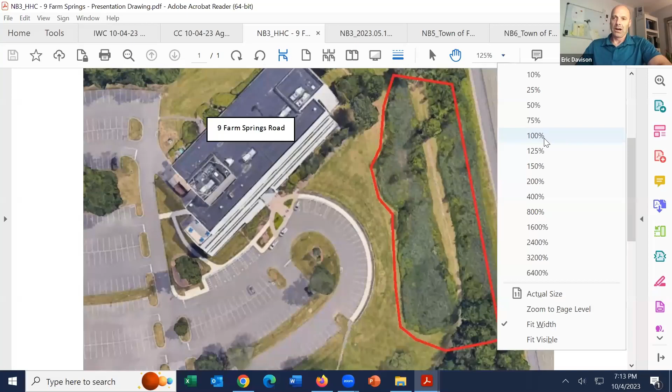My comments here are not referencing the highway right of way, because Andrew's arborist has indicated he has the necessary permits to do the work needed in the I-84 right of way, which is not subject to Farmington's regulations anyhow. So to reduce confusion, my comments relate just to the detention basin. All of the trees we want to clear are in that detention basin.

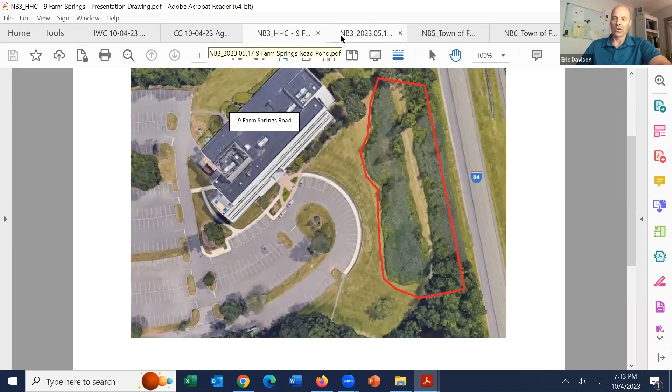The detention basin is entirely man-made. It is a stormwater structure created in the 70s, built in an upland. It has no relation or origin to a natural body of water or wetland.

Bruce had indicated in his feedback that I should explain to the commission what the function of this wetland is. The principal function of a detention basin is water quality renovation and water quantity control, protecting downstream waters from the impacts of pollutants in stormwater. So that's the function of this wetland.

In its current state, it's not functioning well because it hasn't been maintained in many decades. Our best assessment, because it's so thick, is that it's in a flow-through condition, meaning stormwater comes in one side and out the other on a gradient, with no retention time we can tell. There's probably not much storage in there, so you're not getting opportunity for sediment fallout or slow release of flow and interaction with dense vegetation over hours and days, which is how stormwater gets clean before discharge. So our best assessment is it's not functioning that way anymore.

Some background on detention basins themselves: going back to the late 90s, when I first started as a soil scientist, the state gave guidance for the first time on what soil scientists do when they encounter a detention basin or created stormwater wetland on a site. Are those regulated? Technically, yes, they are regulated as wetlands, but solely for the purpose of protecting the design function of that resource.

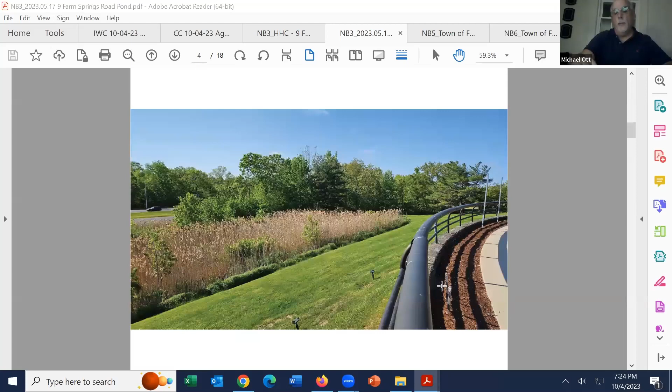So just really briefly, the design plan that Bruce was nice enough to get us from the town's records has a 1979 date on it. I mentioned this at the last meeting - I think it might be fair to say that stormwater quality didn't have the same focus then as it does today.

We don't know what the actual design intent of the stormwater basin was. More than likely, it was purely intended to be a stormwater detention basin - in other words, intended to control peak rates of discharge leaving the basin. However, as we discussed last time, there's a 12-inch diameter pipe and a 24-inch diameter pipe, and those are rather large waterway openings as outlets for the basin.

So we'd have to, just really briefly, determine the exact catchment area or drainage area - the land area that contributes surface water runoff to the basin - as well as the storm drainage system, which you can see here in the town's GIS that Bruce has up, that is discharging to the basin.

It appears, in my quick look - I mentioned this last time - that parcel or street address number 10 on the other side of Farm Springs Drive or Road may contribute stormwater runoff, at a minimum through its storm drainage system, to this basin.

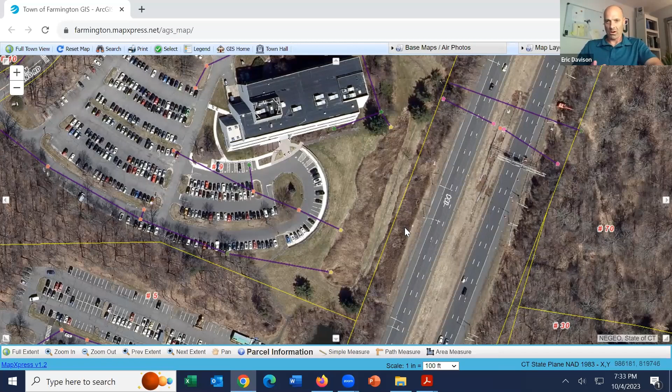I guess what I'm struggling with is, from a habitat perspective, you've got basically a Phragmites monoculture. You've got no standing water. And you've got stormwater, which is obviously low quality water with pollutants in it and low dissolved oxygen. There are a million references showing that a stormwater basin that's a Phragmites monoculture next to a parking lot on the highway doesn't have any habitat value.

Could it be improved if you converted that to native vegetation with a seed mix and low growing, more diverse wetland vegetation, which would be the intent? It would be better, but I would say there's very little habitat value with a stormwater basin in this landscape context. There's no open water for any amphibians to breed.

Yeah, I just, without documenting that firsthand, I can tell you that I see no opportunity for any real habitat value. But I'll let you go on to the other commissioners.

Thanks for the feedback. You've probably gone a long way towards coming up with the functional assessment, so you probably supplemented a little field work for that additional review. It probably wouldn't be a big deal to roll that into the overall work plan. So thanks for the feedback.

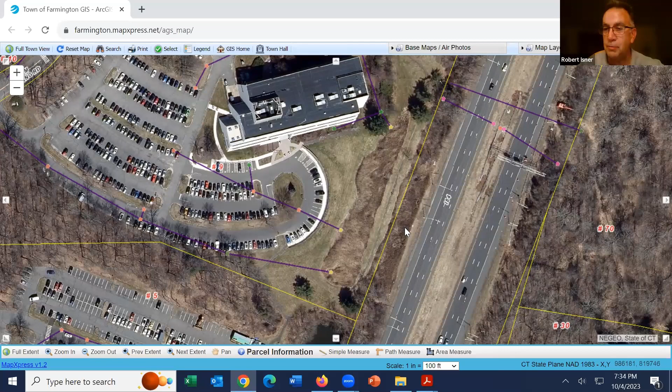I'll go around and Chairman Hannon, I'll give you the first opportunity for additional questions or comments, recognizing that you're present, and I'll then go alphabetically after that. Bruce, can you pull that picture out a little bit so we see a little bit more of the surrounding properties?

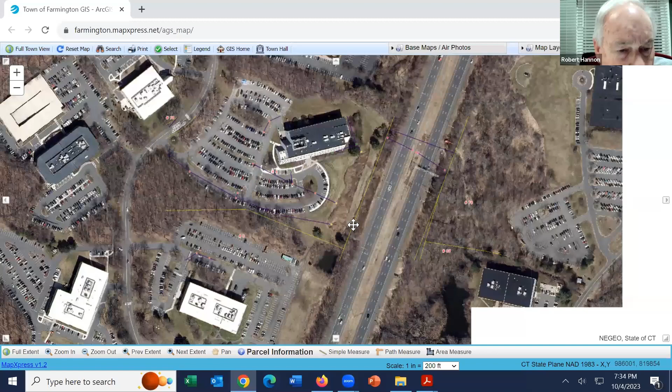How's that? Okay, that's maybe a little too far. The reason is, what I'm trying to look at in that area is where a bunch of the stormwater currently goes. It looks as though a lot of it comes down that one pipe. I'm assuming that's the 24-inch pipe.

Okay, now the reason I'm asking is because one of the issues that we've dealt with in the past is when you start getting higher concentrations of salt and stormwater, things of that nature, it tends not to be conducive for vernal pools and things of that nature.

So I kind of understand what Eric's talking about, in terms of just because of the nature of where the water's coming from, how that really may not contribute to any positive aspects of habitat for whatever type of invertebrates might be there, which I'm not even sure there would be because of the highway and just the heavy use of the property in the general area. So I agree with Eric.

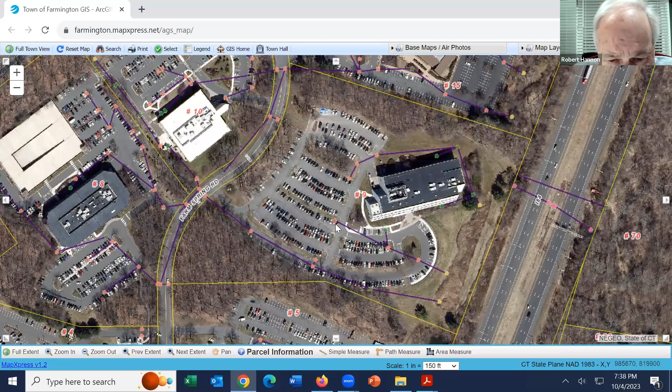I guess where I had some original concerns, but again, it wasn't from firsthand knowledge, but just kind of what I've heard, because unfortunately I missed the last meeting, was cutting some of the trees.

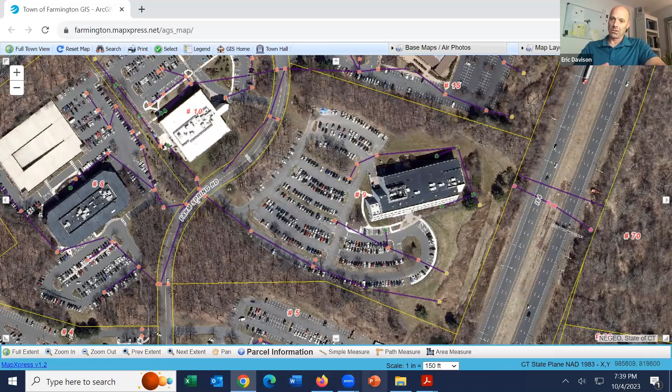It sounds like right now the entire basin area, the trees in there, all that's coming down as a way to restore the basin. The question came into play, assuming right along parallel to the property line along the highway, that's where the walking trail is. And the area you were talking about, where there would be clearing down to the highway or the fence, what's on the eastern side of that walking trail, correct?

So it's selective cutting of saplings. You're really converting what's now being slowly converted from a marsh to a forested wetland - it's just going to be converted back, which is what DOT is doing along every highway in Connecticut right now, basically cutting those roadsides. So it's not a significant change to the wetland, it's just controlling succession from marsh to forest and taking out this tree sapling. Without stumping and without machinery in the wetlands, that's very low impact.

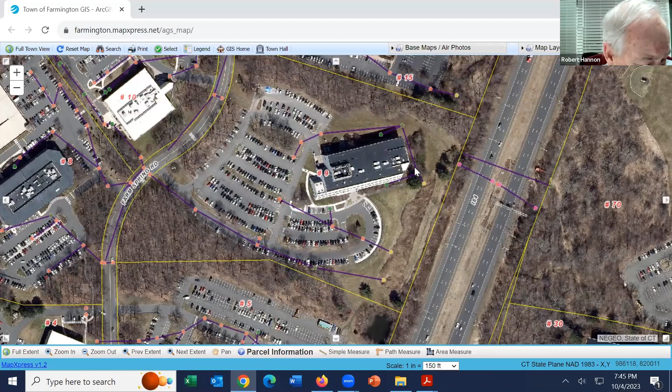Especially if Mike, if it showed that you couldn't get proper sediment control with just the basin renovation itself, that would be good pre-treatment.

Okay, thanks Robert, I think that does it for me. Okay, we'll go around alphabetically to see if there are additional comments or questions. Rich, that'll bring you up. I think everybody's pretty much covered everything I had today, so I'm good. Thank you, okay, Commissioner Fox.

Yeah, I'm in pretty much the same situation, but I'm confused as to what it is we're going to be approving. Is it going to be a two-phase thing? Would we approve them taking down all the vegetation and then approve a plan for the better water quality basin? Or are we going to do it all at once?

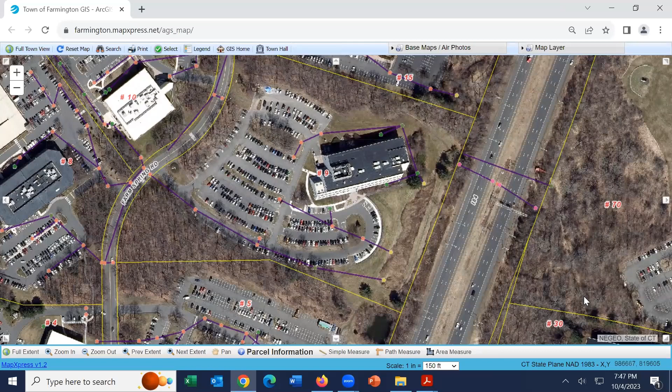A great question, Dave. I was buried behind one of my screens here with the agenda review notes, and I'm not immediately finding the staff recommendation. So Bruce, if you want to give us a reminder on the recommendation for tonight, that would be helpful. Well, that was the request of the applicant - they were looking to do this in a two-phase process. First phase would be to clear the trees, second phase would be to do the surveying and design, then the earth excavation and removal of material, and then the upgrades to the basin. Okay, that seems to make sense. Thank you.

Commissioner Kelsey. Yeah, first of all, thanks for the additional perspective and information tonight, very helpful. Just one question on the mowing.

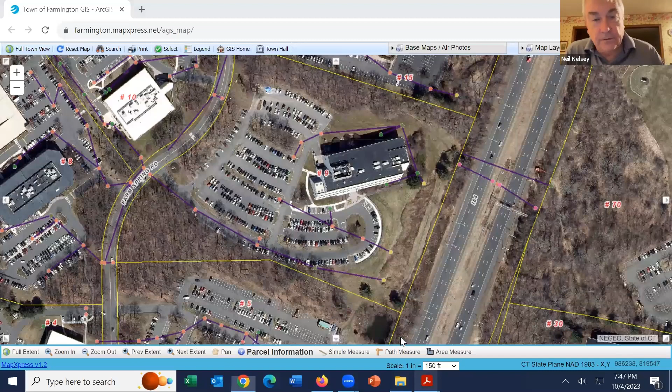If you go back a couple pictures, Bruce, where the fence line was on the left - I think Commissioner Hannon was talking about mowing the stuff to the left there. There's a fence in there, if I recall, right? So the fence is right about there. Who would be responsible for that mowing - is that Hartford Healthcare or DOT? Who's responsible for the other side of that fence? The fence is roughly the property line, that's the no access line. So everything on this side of the fence would be the property owner, everything on the other side would be DOT property.

So any mowing Commissioner Hannon was talking about would be done by the DOT in that area? Well, they have a permit from the DOT to do the initial clearing in the right of way, they got approval. Yeah, I'm talking about the ongoing maintenance, so it doesn't come back. Okay, yep.

Is the future maintenance a DOT responsibility, or is that also Hartford? That would be DOT maintenance. I don't know how frequent they'd be in there cutting that. If you look at the road now, their typical interval would be maybe every 10 years, or 5 years, whatever they do. I couldn't guarantee how often the DOT would be in there.

That's why I was asking, it's possible this comes back, right? Yeah, it could. But if you look at this, it supposedly hasn't been cut since 1970 or 80. So if that's the case, we're talking another 40 years or so.

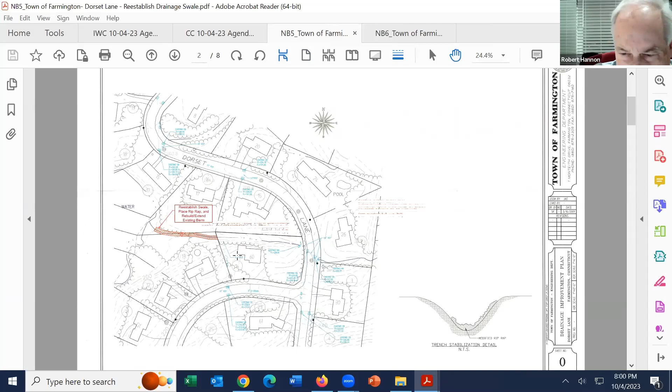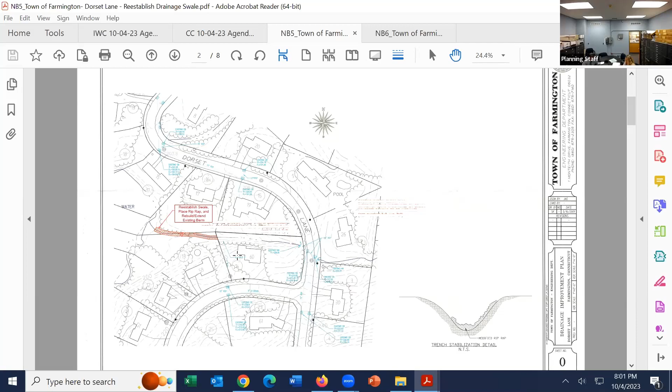Okay, number 6, cease and desist, 504 Main Street. 5 is for the town of Farmington, 17 and 58 Dorset Lane. Am I looking at an old agenda? Yeah, that's probably why you're having problems signing in. No problem, so what is it now? It's for 17 and 58 Dorset Lane, regulated activity. We have Dylan Reilly from the engineering department here. We'll do the Dorset Lane, Town of Farmington.

Good evening everyone, for the record my name is Dylan Reilly, I'm a civil engineer for the town of Farmington. For this application at Dorset Lane for properties 17 and 58, we are looking to reestablish the storm drainage swale that runs from the 54-inch cross culvert there. We did a similar project in 2001. This project is essentially the same, just shifted down the swale to between the 17 and 58 lot lines, where we've had issues brought up by the homeowner of 17, where the swale no longer seems to be holding the water back during mild to larger storm events, and is flooding out his property.

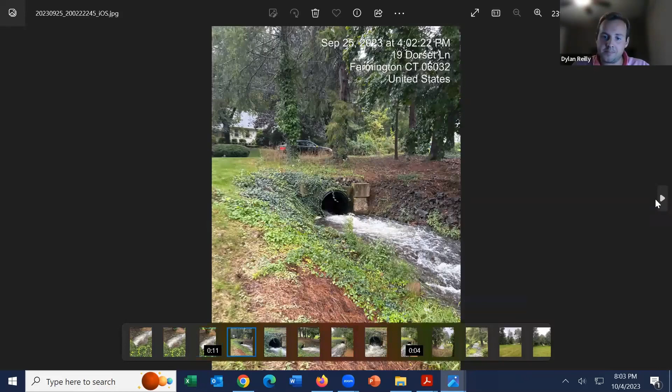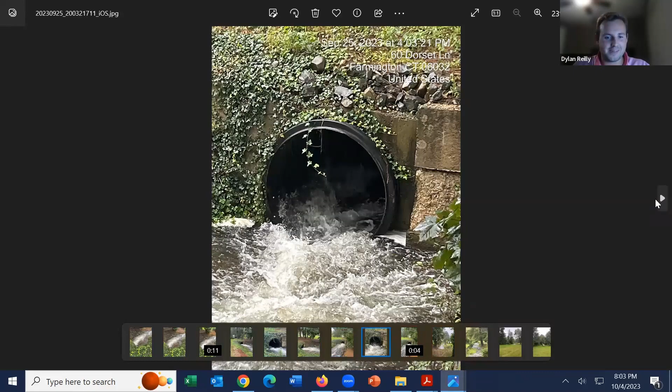As you can see, this is pretty channelized up in this end. I take a lot of photos. This was the 25th, I believe a Monday, and the weekend prior we had heavy rains or steady rains throughout the weekend continuing on to Monday. These photos are Monday afternoon, timestamp 4:02 p.m. So it was still raining, just not as heavy as it was over the weekend or earlier Monday.

So all of this is essentially runoff from up the mountain. And here you can see the back of property 17 Dorset Lane, where the water is intruding onto his lawn area out of the swale, going into Curtin's Pond, or formerly Curtin's Pond. When I was out there, I tried to get as close as I could to the swale where it was failing. That water is approximately 8 inches to a foot thick or deep, perhaps 1.5 feet. So it's a lot of water coming out of the swale and spilling onto his property, super saturating his lawn and making it unable for him to maintain it. And then it sheet flows off his property to where Curtin's Pond was. A tree has fallen, but doesn't seem to be affecting the swale.

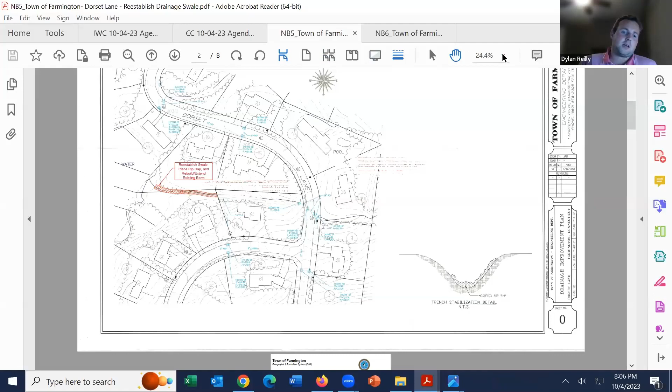Our plan is essentially the same exact plan that we did up the swale between 19 and 60 back in 2001. We're just moving down the swale, doing the same project further down. The call out here is to reestablish the swale by removing any debris and sediment within it, just as we did in 2001. We'll be placing riprap to curb erosion and prevent this from happening again, and we will rebuild and extend the existing berms on either side of the swale, rebuilding where they've failed and extending where needed, as was similarly done in 2001. The hatched area shows the approximate area of work.

Is there a reason why you're just stopping the work right at the property line? It's all channelized up there, and I see no issue there.

I think you could see from here how well channelized it is through there until it gets past that shed, over in here. So it's past that area at that point. That's where it comes. It's fairly well channelized through 58 as well. It really starts degrading once you get to the property line of 17 and 58, that's where you start seeing the big change. I just went that far back in case there was anything up the swale that we needed to correct while we were in there doing work, but I don't foresee us going any further than the property line of 60 and 58.

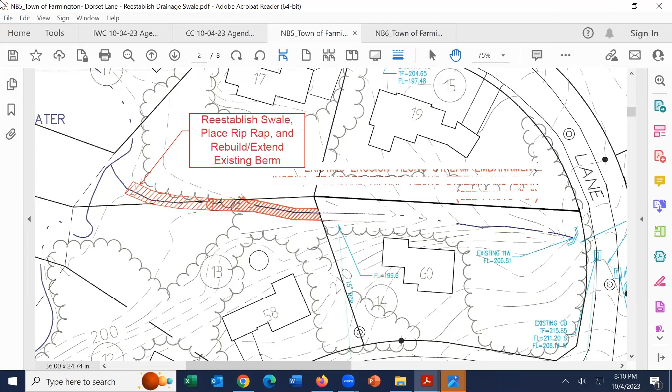Okay, Rich, comments, questions? No, I don't have any questions. Thanks. Okay, Dave? I was just curious, what happened to Curtin's Pond?

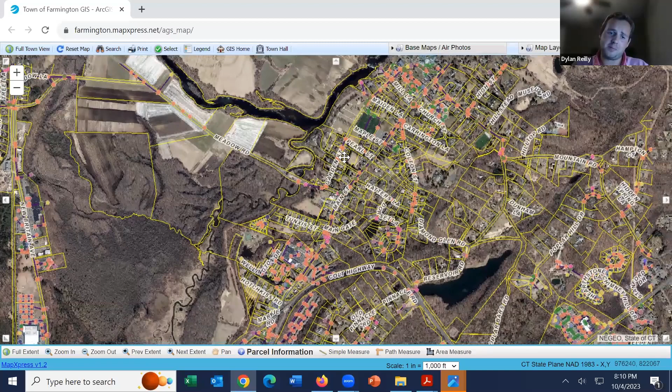Late December '22, the concrete dam had a complete failure. I don't know if Bruce has the photos available, but essentially the concrete wall broke down the center and blew out chunks of the dam wall, and the entire pond has been drained as a result. The residents are currently working with DEEP and the state of Connecticut to figure out whether they will be rebuilding the dam to restore the pond or doing a dam removal. But this pond is entirely private, owned by the property owners at 11, 15, 17, 58, 54, 52, and 50.

Thank you, I was just curious. Of course. Is that it, Dave? Yeah, that's it. Okay, thank you.

Robert? The only comment I have is scheduling might be tight because we have to just accept the application tonight, which would kick it back 2 weeks. So hopefully there's still enough time to hold to the schedule, Dylan, that you guys want to do this under.

Yeah, but Bruce, correct me if I'm wrong, if this is accepted as a maintenance project, do we have to go to a second meeting, or is it just one meeting? No, that's the whole point. It's if it's permitted, they're requesting it to be a permitted use as of right and a non-regulated use.

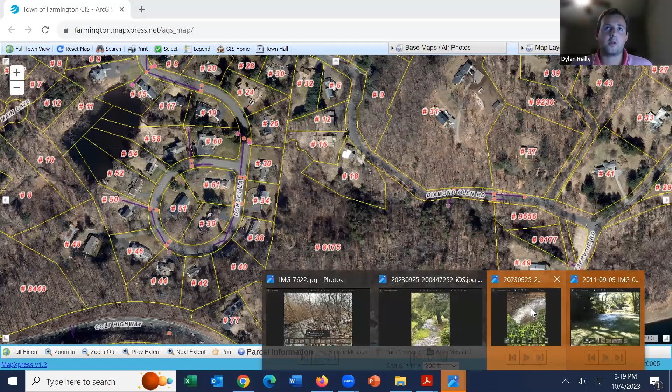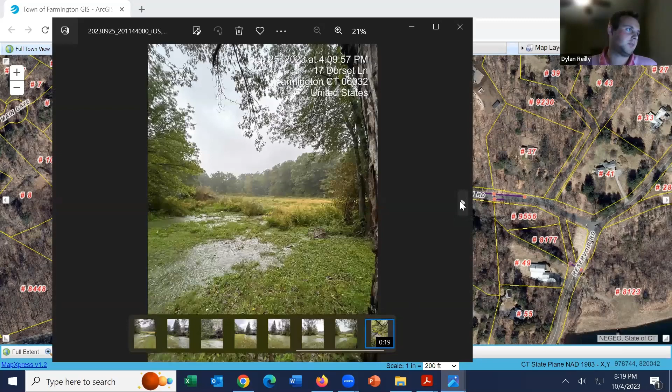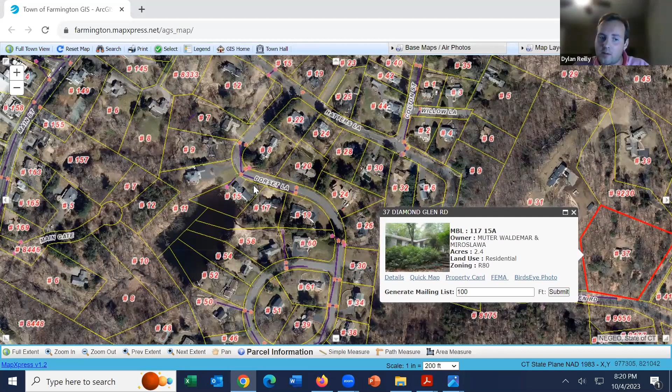The current condition of where the pond formerly was, Bruce, if you go to my last photo from this year, I took that from the road, between homes 11 and 19. There are two main points where water comes into the pond: at 17, and the Gunner Culvert crossing at 15. The homeowners, because they haven't come up with a formal plan yet to determine the future of Curtin's Pond, have let it channelize through the pond and let vegetation grow throughout spring, summer, and now fall. So essentially it's just marshy grassland at the moment.

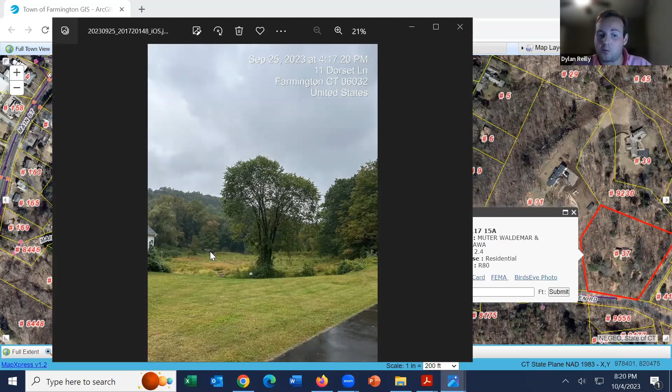But again, the residents—I actually spoke with one of them today. I was out there for a separate road issue. She explained that they are working actively with DEEP and the state of Connecticut to find a solution here.

Okay, thank you. Yeah, I don't particularly have any heartburn about following past protocol, putting this in as a maintenance project. The swale exists, there's a problem with the swale, it needs to be repaired. So I don't have much of a problem with that. I guess that's about all I have.

Well, I guess the bigger question is whether or not other folks agree with that. I heard a couple people specifically mention it. So Rich, I'll go back to you—do you think this is a maintenance project? Do we need an application? What's your take?

No, I'm fine with considering this a maintenance project, wanting it to move ahead in the short time we have this fall. Okay, thank you Dave, I agree. Thanks Robert—yeah, with some hesitation, I agree. The amount of work to restore back to the 2001 plan is a bit more than we usually see for routine maintenance and restoration work. But it is the town's obligation to maintain the structure and water flow, so I agree it can be handled as a no-permit, no-application-required maintenance activity. Thank you, Neil? Yeah, I agree. Thank you, Ned, I agree. Karen? I'll go with the consensus and agree also. And I feel the same way.

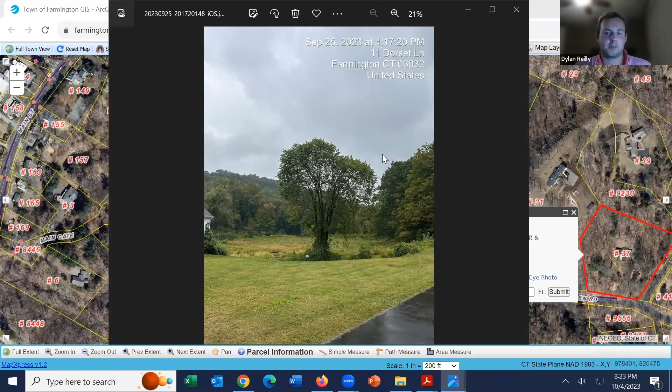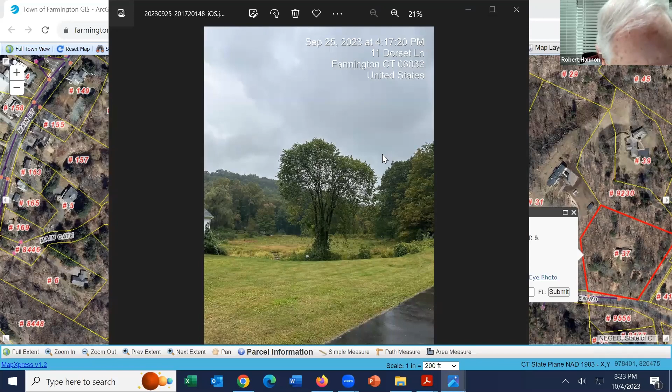So would somebody like to make a motion that this is a maintenance project? And Bruce, you can cite what section of the statute. Got it right now, and it will not require an application. So what's the section of the statutes again? That's going to be section 4A6. Okay, so moved, Ned. Second by Ned. Okay, so we have a motion to approve this as a maintenance project under section 4A6.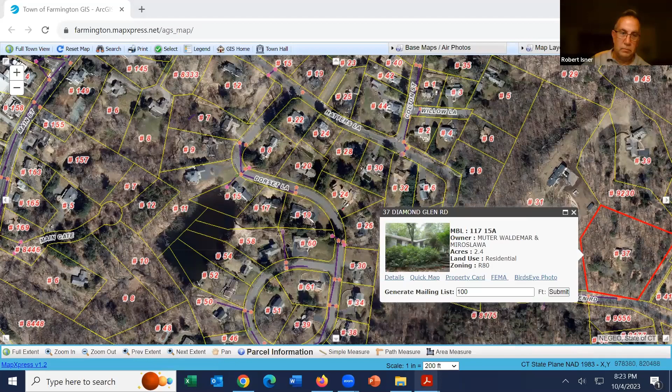All those in favor, please signify by saying aye. Aye. Opposed, abstaining? Good luck working through the next little wetland areas, because I guess we've got a bunch of rain coming in Friday or Saturday. Yep, so have fun.

Unfortunately, it has been a very wet summer. Well, what are we, about 9 or 10 inches above normal rainfall already this year? Yeah, we're 13—13 inches in September.

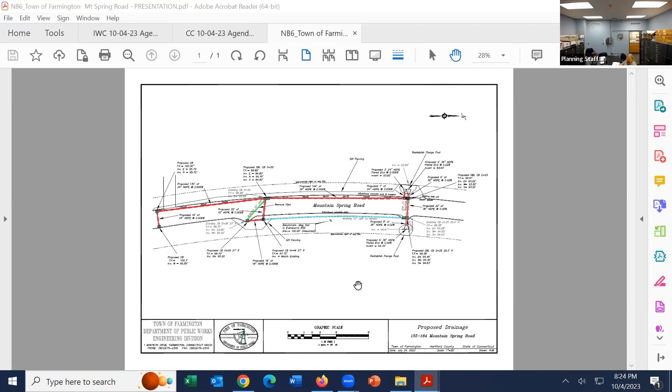Okay, so now that I have the right item and the right agenda up here, the next item is Town of Farmington, Mountain Spring Road, the right of way between 155 and 164 Mountain Spring Road.

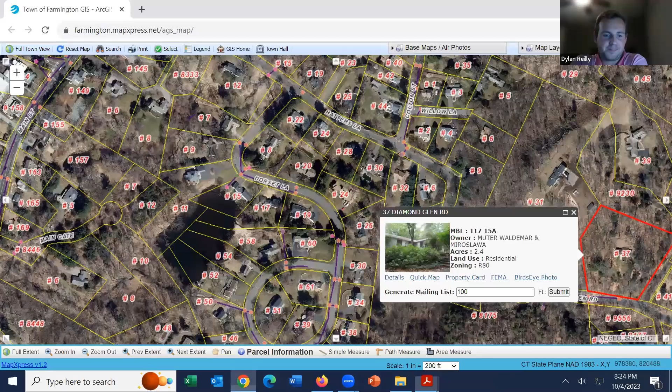Again, for the record, my name is Dylan Reilly, Town of Farmington civil engineer. This project at Mountain Spring Road, between the properties of approximately 164 up to the southern edge of 155, is a drainage project where one of our cross culverts seems to be undersized for the amount of flow it's been getting. The cross culvert services a drainage swale that serves much of the eastern side of Mountain Spring through its respective section.

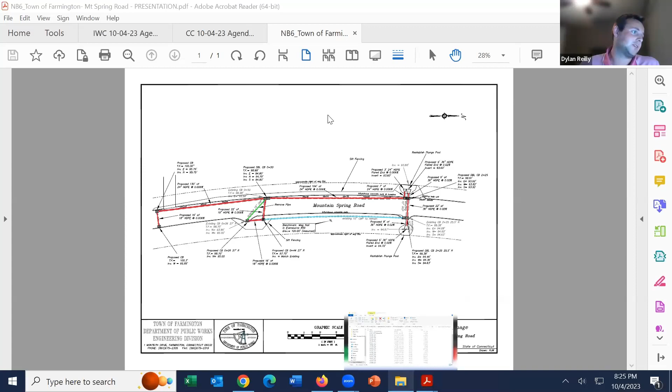This extends from approximately property 164, 154, 140, as high as 136 in terms of span of coverage. This swale in a normal season is dry throughout the year, with the exception of larger storm events, from mild to large storm events, and water will trickle during smaller storm events through the culvert.

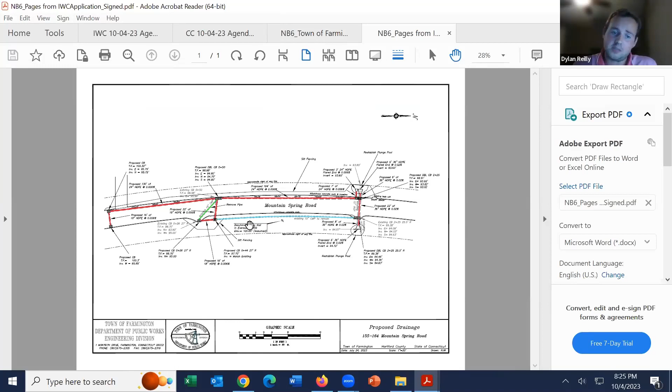This year we have seen much higher rainfall, and we've had a lot more intense storms, with numerous occasions where the road has overtopped in terms of stormwater building up behind on the eastern side of the road, overtopping the road and finding its way through the woods down to the culvert crossing at the driveway of 155 Mountain Spring, causing damage there for that resident. We are also experiencing some damage.

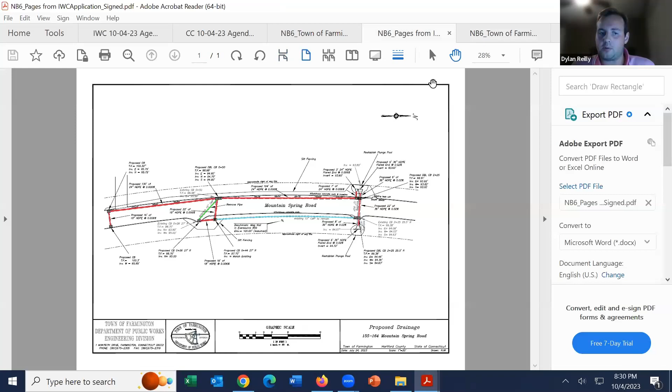Here is the plan. The new pipes are colored in red. The existing pipe to remain is the teal blue color. And then we have an existing corrugated metal pipe that runs under the road that we would like to remove, just because they tend to fail over time, and we like to take them out whenever we can.

We are adding several catch basins to the road. We are adding two south of the driveway of 155 to catch runoff from the road prior to the driveway, to help curb erosion of that driveway. During larger storm events, the driveway will actually get overtopped as well from the runoff of the road, further eroding parts of the driveway and adding to the problem at hand.

We are adding a catch basin just off the road, right there, to help reduce the likelihood of the roadway overtopping again. That will be placed about a foot from the gutter, below that elevation, so that we have a foot of freeboard between that and the roadway. That's why we are keeping this 15-inch corrugated metal pipe, to help reduce the likelihood of the roadway overtopping. And then we are adding this longer trunk line to service all of our roadway catch basins.

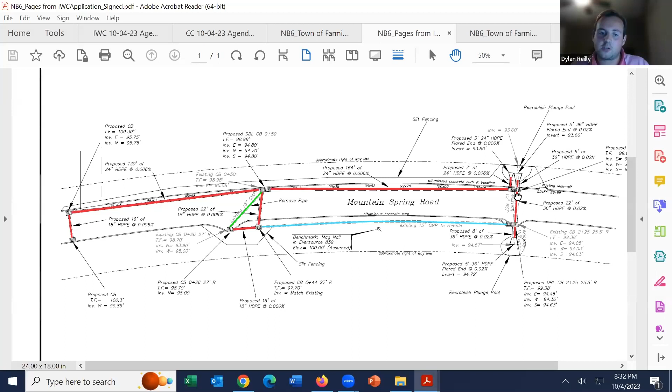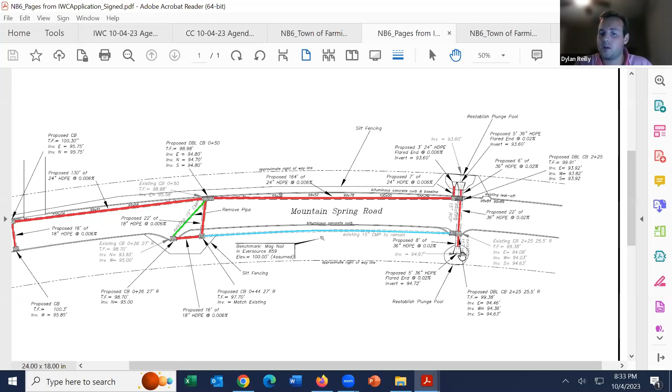As part of our work, we will also be redoing the plunge pools on either side to mitigate erosion and sediment getting into the pipes, as this is a really flat area. So we are trying to mitigate the maintenance of going there and cleaning them out or getting filled during longer drawn out storms that may last, like it did a couple weekends ago, Saturday, Sunday, Monday, where you can experience problems.

That is essentially what we're doing here, is we're just trying to get the water into its channel so that it no longer flows down the driveway or through the woods to the driveway of 155, getting to his culvert crossing and eroding much of his driveway. But again, we have the public safety issue of the roadway being eroded at that curve there between the catch basins, between the two double catch basins on the top of the page, or on the westerly side of Mountain Spring Road.

Not going for a maintenance application on this project.

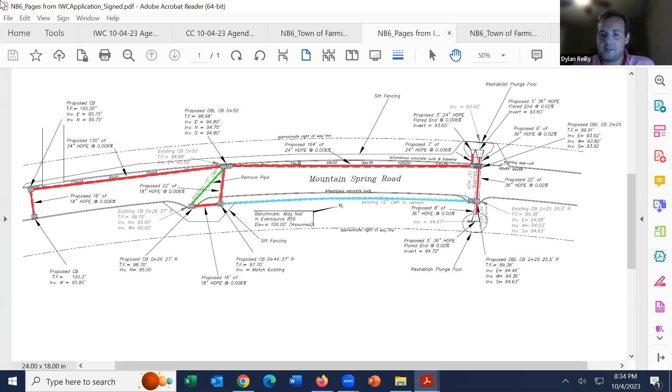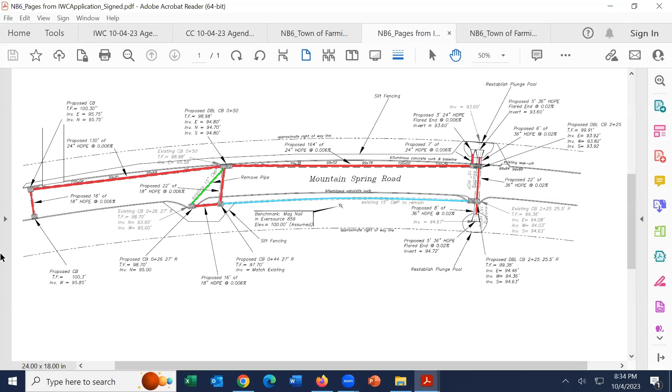Thanks, Dylan. Rich, of course, start with you. Rich, any comments, questions, concerns? I guess I have two questions right off the bat. Where is this in relationship to the pull off that we took a look at for with the land trust? Land trust? Yeah.

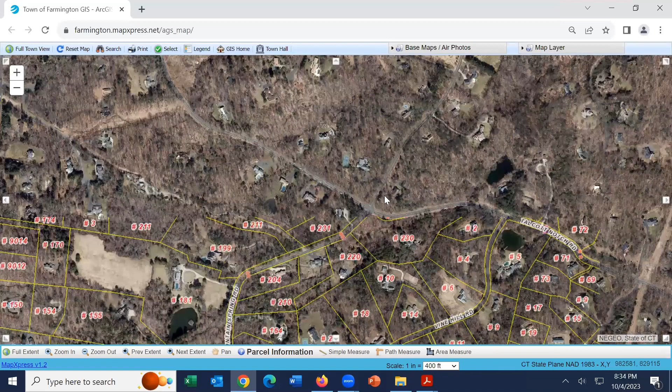Here's Talcott Notch. All right, here's where they're doing the work. The pull off is down here. Okay, so it's quite a ways away. Yeah, over here. Right over here. Here's the land trust property, so right here. So you're probably, and it's not in the same drainage pattern either, because it's a low point here, but you're 1,500 feet away. So okay.

Okay, and then the other question I have is what are the wetland resources in this area? I mean, it looks for the most part you're doing work in the roadway or directly adjacent to it. So the wetland resource is the stream that we're discharging to, west of Mountain Spring.

I guess the wetland resource is the swale and the cross culvert. The water comes off through here, you can see it. Runs in a swale along the east side of the road into the basin or into the cross culvert, and then comes out to the west side and flows down to there. So there's wetlands here and there's a wetland on this side as well.

Okay. And in normal, I want to say before 2023, this was an intermittent water course. Yeah, before 2023, again this summer, it's been extremely wet. This has been more seasonal, depending on rain and rainfall intensities and runoff from the mountain. That's really the only time you'll see water running through this culvert.

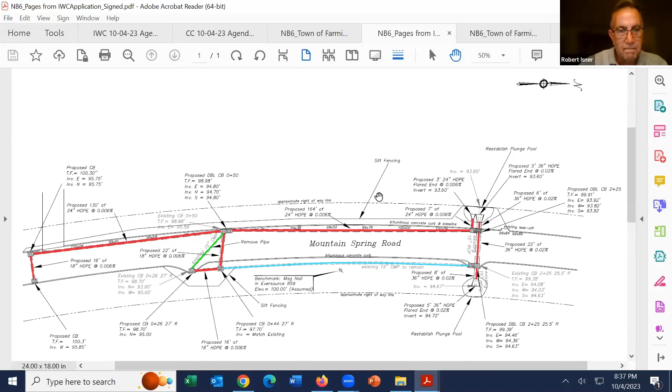Okay, thank you. Yep, thanks Dylan. Robert? Only comment is it appears to be very necessary work, so I look forward to accepting the application and moving quickly on our next meeting. Okay, thank you. Neil? Nothing from me, thanks. Okay, Ned? No, I don't have any questions, I think it was well explained. Okay, Karen?

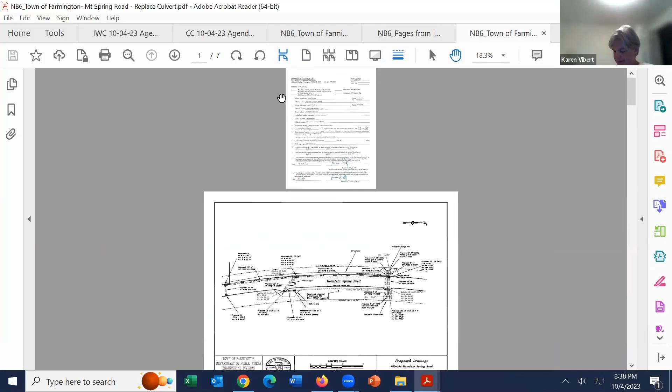Questions? No. Okay, can you blow that map up a little bit please? Which one? You want the, all right, I got that one here. This one here? Yes. Gotcha. Okay.

Seeing as how I'm not finding a number of inverts that show other than like invert matching existing, so for the line coming in right there, this one? So are we picking up water and moving it up to, I guess, like the north side of Mountain Spring Road? Yeah, so that's the west side of Mountain Spring Road, so your top of the page. Okay.

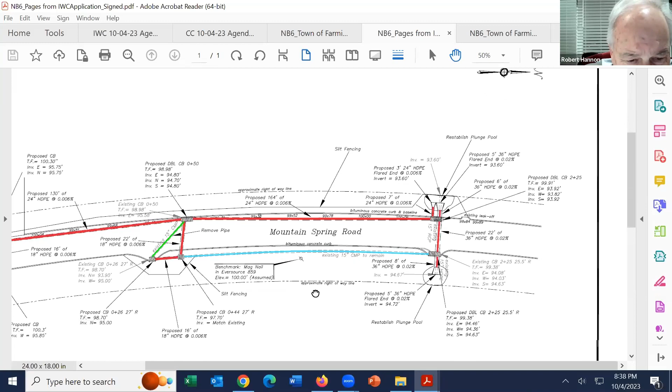Is west. Okay. Yep. So ideally, we want the water to flow through those 24-inch pipes along the west side of the road. That 15-inch corrugated metal pipe is going to be more of an overflow to try and get water to that 36-inch culvert, if there's enough capacity there to take it.

That's why it's there to remain. It's also off the road, so we're not worrying about it collapsing and causing issues. Being a corrugated metal pipe, as they tend to do after 50 plus years, that is why we're removing that existing 15-inch pipe highlighted in green.

So we're essentially moving the trunk line of this drainage area to the west side of the road from the current east side of the road, to utilize that existing pipe as an overflow.

Okay, I just wanted to make sure, the reason I'm asking is because seeing the 18-inch pipes there, and then you've got the teal color, the corrugated pipe is 15 inches. I wanted to make sure we weren't putting an 18-inch pipe into a 15-inch pipe.

Yeah, looking for trouble. No, so those 18s feed into the 24 that runs from all the way up just south of the driveway of 155 all the way to the left side of the page. And that will run all the way to that double catch basin where you see the double outlets there.

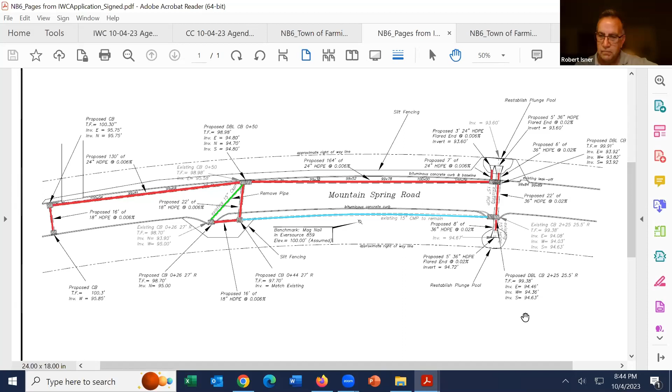Significant raises the bar in terms of what we would be looking at. If we think there may be a significant impact on the wetlands, it steps up to a public hearing. There's a whole process there.

I mean, it's conceivable that somebody might have felt that way with a brand new project, but this is primarily maintenance and replacing some existing culverts, things of that nature. So it's work that's already been done. So I think people are saying that they don't really feel as though this amounts to significant activity. Yes, I agree with that. I just needed to understand what it meant in this particular context.

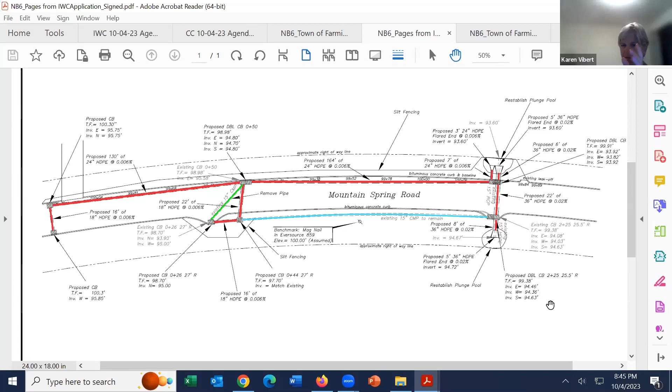That was a great explanation. Thank you very much, and I agree. Okay, and as do I.

So if somebody wants to make a motion, this is not a significant activity? So moved by Dave. Ned, was that you seconding in there? I'll second. Okay, so I have a motion on the floor. This is a non-significant activity. All those in favor, please signify by saying aye. Aye. Opposed, abstention. So I guess we'll see you in 2 weeks.

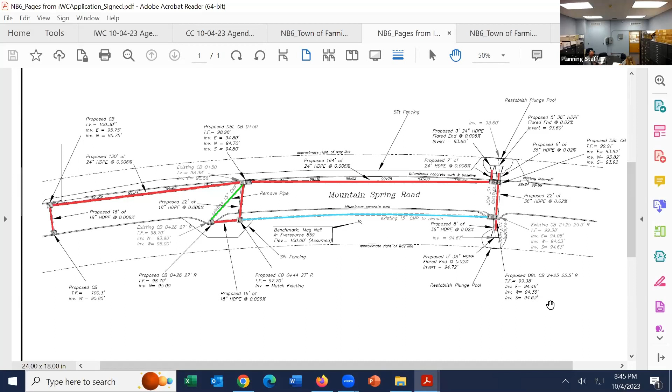All right. Okay, awesome. So we're up to cease and desist, 504 Main Street, correct? 504 Main Street. Yes, sir.

Okay, a second here. All right, we have Ian Cole on here. I think he's still on. I'm still here. There, I see him. He's not hiding. We received this plan this morning, so pretty much everyone's seen this for the first time. I kind of looked at it quick this afternoon just to get a quick little look at it. But I'll let Ian go ahead and do his presentation.

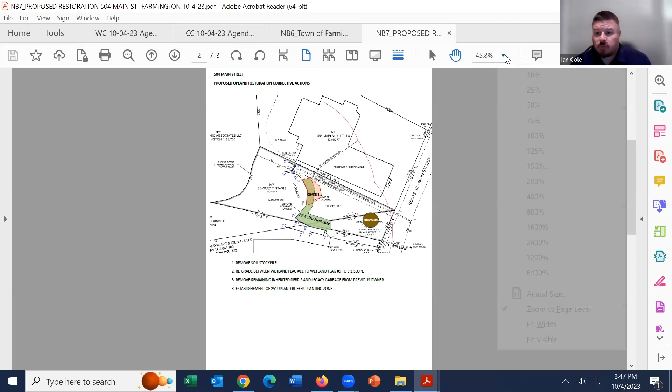Sure, thanks. For the record, my name is Ian Cole, professional soil scientist, professional wetland scientist. I'm here tonight on behalf of 504 Main Street to resolve their notice of violation for the unpermitted clearing of the upland review area adjacent to the wetland boundary. When we last left last month, we went over a memo that was generated to document what the disturbances were and the limits of them, and to ensure that no encroachments into the wetland proper had occurred. Our marching orders from there were to come back with a restoration plan that would adequately protect the wetlands and also provide some accommodations for future development of this area, which was the original intent of the clearing.

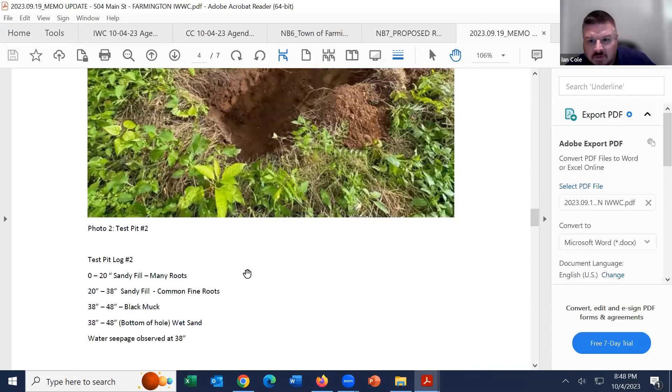So to those points, I went back with the applicant and met with town staff and had some back and forth. We basically came up with four main action items. Bruce, do you by any chance have the memo from September 19th? There's some photos in there that I think provide good context. Your memo? Yes, all right. September, let me go back to our folders here. 504 Main Street, wetland report, survey, and the memo update. Okay, on page maybe page 5 of 7, photo 4, I think. Let's see. Photo next, 4. Gotcha, yeah, that photo there.

So this is just to provide context for the commission. To the right of the photo where the silt fence is, at the toe of the slope there, that's the limits of the jurisdictional wetland boundary. Basically this is the upper limits of the floodplain of the Pequabuck River, which is a tributary that goes to the Farmington. The area to the left of the photo, that's the upland review area.

So one of the main parts of the restoration here is in the foreground, where you see some of the erosion control blankets and the person standing. This is an area that had some ground disturbance and a lot of garbage that was being removed. The area was temporarily stabilized with erosion control blankets. It's an area that, before some of the site grading occurred higher in the landscape, was a point of concentration, so overland flow ran along the side of the building and then made its way over here, and then you get some rilling effect. That's been mitigated with the hay bales and the regrading up above, but it's still kind of an irregular slope.

For the long-term stability of the site, it was decided that between wetland flag 11 and wetland flag 9, as shown on the PDF earlier, that area would be peeled back. Essentially a little bowl would come out, and it would look like, more or less, if you see where the person is in photo 4, that would be the new top of slope, graded down 3-to-1 in a nice uniform slope, so that you wouldn't be creating any future points of concentration.

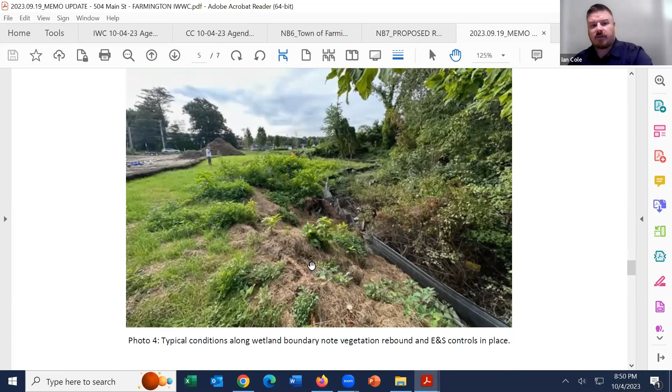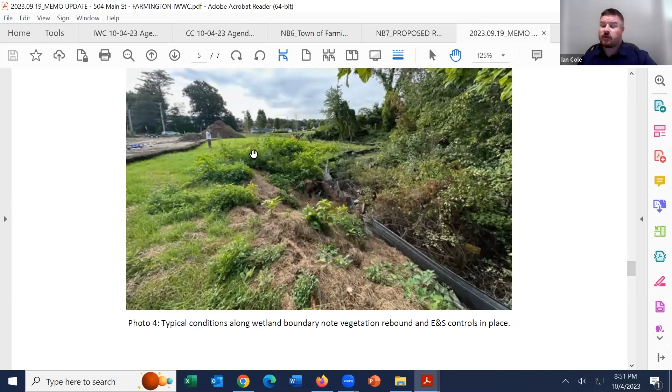If you look at this photo, and photo number 7, you can see all the scrubby area that kind of parallels the silt fence. That zone's about 25 feet wide. So what we're proposing is basically, everything to the left of that slope is the area that was established grass and was restored up to this point.

Moving forward, they would come in and regrade this area. Right now it's all scrubby area in that 25-foot zone, a combination of Eastern black nightshade, American pokeweed, docks, and beggar tick, basically weeds. So we would remove those and regrade that area out.

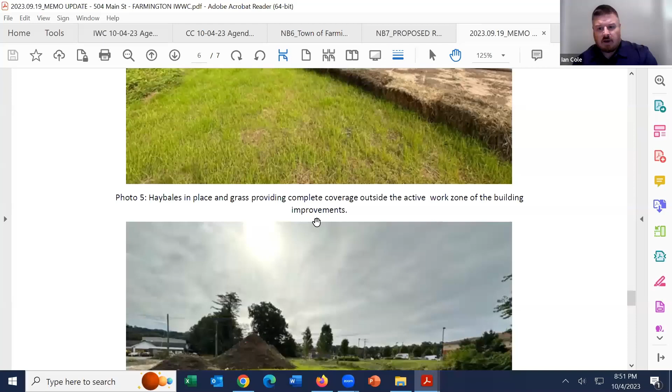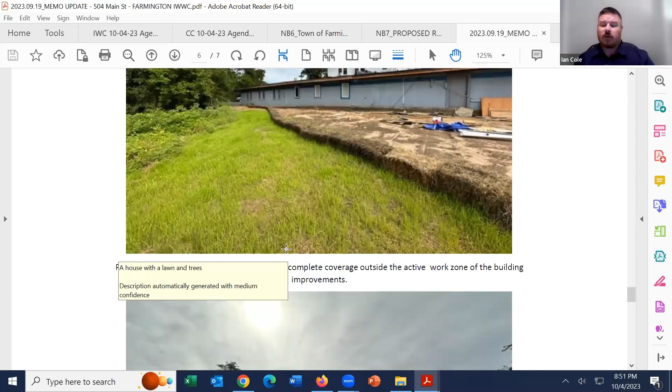Bruce, if you could scroll down to photo number 5. If you want, we could stop and look at this again. So the grass area would stay, and to the right of the hay bales is still kind of an active work area. They're repairing the roof of this building and doing some new gutter work to better secure the building. Eventually that area will be regrassed also.

Moving forward, the other part of the plan, this stockpile of soil will be removed off site. Some incidental soil may be left to backfill behind the hay bales when they're done with construction activities for the building, to reestablish some additional lawn, but otherwise that's gone as part of this. In photo 7, you can see the change in the grass.

So the area we're talking about planting is basically all that scrubby area that's coming in. This is a nice flat zone, a nice thick zone. We're picking 4 shrubs, typical shrubs that are commonly found adjacent to these floodplains.

Basically, one of them is shadblow serviceberry. This is a tall shrub that's going to grow and give you some height, so that will be a backstop to this planting plan. The infill to that is basically some chokeberries, some dogwoods, and some northern bush honeysuckle.

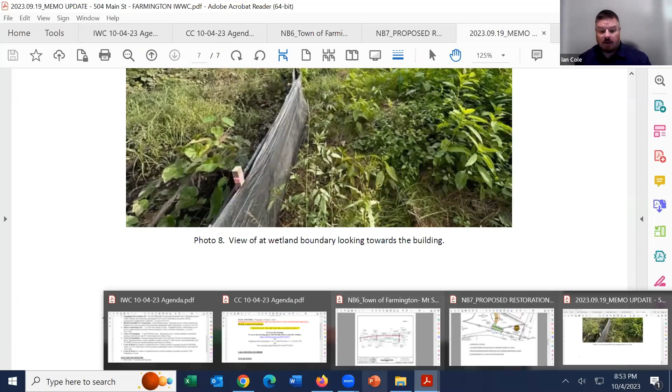We're proposing 45 shrub plantings at 4 feet tall, the tallest container size available from New England Plants. There's enough time left in the growing season to secure this material, get the 45 plantings, get the E&S controls, the erosion blankets, and the seed mix.

I know that Val has equipment on site. He's prepared to get this installed this growing season, and then we would monitor it and come back to the commission by June 15th of next year. So basically go through the early part of next growing season and come back to the commission with a report to tell them the plantings were successful, that they're doing well, any remedial actions that need to be taken, do any of these plantings need to be replaced.

Most importantly, as I highlighted to Val, my concern for this area - I'm glad to see there's been no evidence of it coming in, but there is Japanese knotweed adjacent to this specific area on the other side of the property. I've gone through it with him, some best management practices he can do to make sure he doesn't commingle any of the materials so nothing unnecessarily propagates over here. But I told him specifically that's something that's going to need to be addressed to make sure it doesn't take a foothold in here.

Outside of that, I think planting 45 shrubs in this zone is a nice robust feature and will also allow him the flexibility of not having any conflicts in the future when he comes back to the commission for site improvements to expand future parking, along with the typical site improvements such as the water quality features that go with that.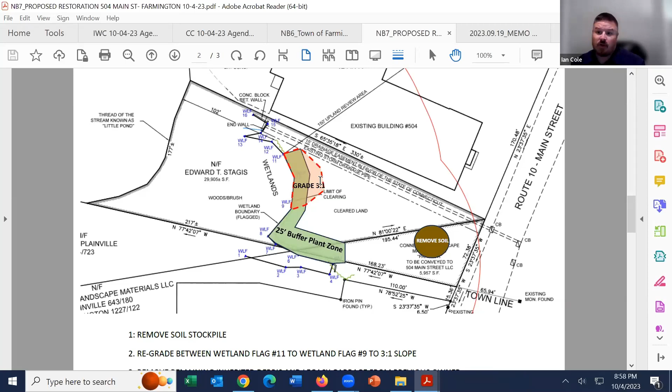And so there would be 45 shrubs, you said? Yes. That area comes out to about 2,500 square feet, and when using planting charts, there's a standard equidistant planting chart where you take 8 feet on center using 4-foot tall shrubs. It basically spits out a number that you need 44 plants, so I just rounded up to 45.

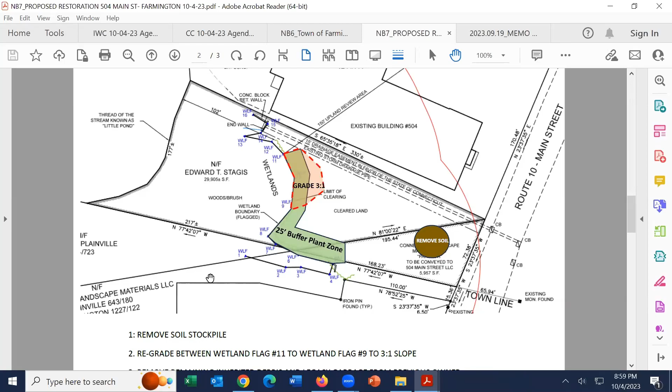Okay, I guess one of my concerns is that there were a lot of trees removed from the 150-foot setback area. So you're taking away dozens and dozens of trees and replacing them with 45 shrubs. I'm not sure that's appropriate compensation, but go on. And usually I think we have more than one growing season of monitoring to make sure these species do survive, so we might want to do at least one more growing season for monitoring. That's all I have for now.

Thanks, Dave. Robert? No questions. Okay, Neil? No comments or questions. Ned?

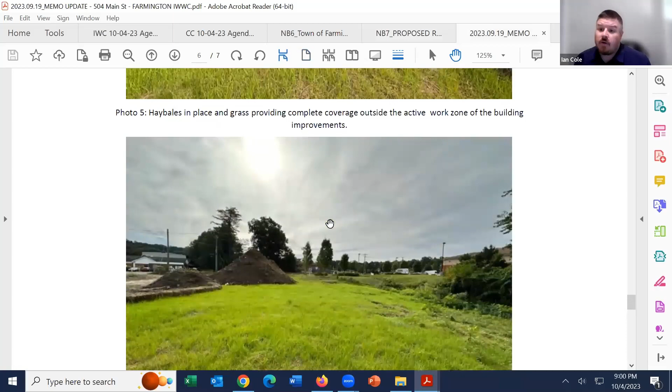How long, you said the area that has not been planted, it's because they need a work area for doing roof repairs and other building repairs. So how long until those repairs are done and that area can be seeded? I do not know the answer to that question, but I could find out. I know they're actively working on it, it's not sitting idle, since I personally live around the corner and drive by this area almost daily. But I can certainly ask and get that answer for you. I know he's actively working on securing the building, but I have not been given a time frame of when that work would be completed.

Okay. What was conveyed to the applicant was they had a strong interest in delaying restoration so that things could be tied in together with the DOT drainage easement project. We had to do a lot of convincing to have them understand that those are two processes on two wildly different timelines.

The replacement of that drainage could be something that's several years out. And obviously this area needs to be restored and can't be left in its current state. So the idea is to secure the site.

He does want to come back before the commission with a plan set update to show improvements for additional parking, that's what he has told me. But he's just not in a position to do that at the moment. Again, to not delay any activities from happening on the property that would benefit securing the site, he tabled those ideas because frankly he wasn't at a point where they were formalized enough to come before the commission with a full plan set for what he needs for parking and things like that.

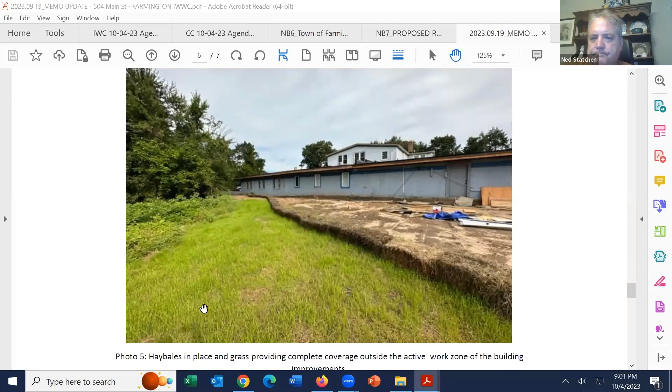I agree with Dave in that there were a lot of trees removed here. But I do understand, I've actually been involved with renting some of that space of the building, and I understand there is more need for parking. But I would think when he comes back with a parking plan, I don't know how we would do this, but require his parking plan to have some trees included in it, at the edges of the parking areas or something like that, to basically infill what's left over that's not needed. That's all I have, thank you.

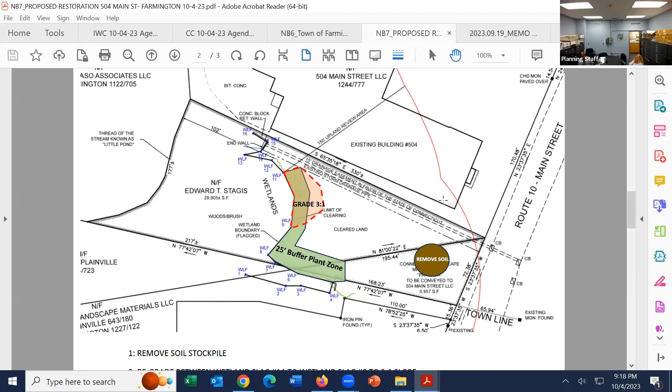Or at some point we have to say, look, we're not going to get these done, this is going to be a spring planting. No, this needs to be a fall planting. Exactly, and that's what I'm trying to understand, because I want the engineer to get back to him and say, I can't do that right now, there's no way I'll get you a plan in two weeks showing everything. So if he can't do that, that gives you practically only one meeting left to review everything, approve it, and gives him about two weeks to buy the plants and install everything. So it's really pushing everything up against the wall.

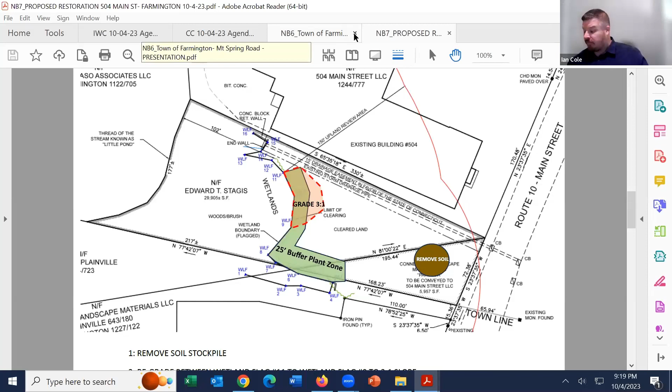Okay, so I think we have sort of a path going forward on this right now. And you're clear on it? Yeah, I have my notes, basically the three revisions to the plan, and then the two concept asks from here. I'll follow up with Todd Clark also, Bruce, to put an earworm in his head and let him know people will be talking to him, and I'll impress upon the applicant that he's going to have to put some pressure and heat on to get plans drawn up and give some thought to these things to put this to bed. Exactly, perfect, okay, all right.